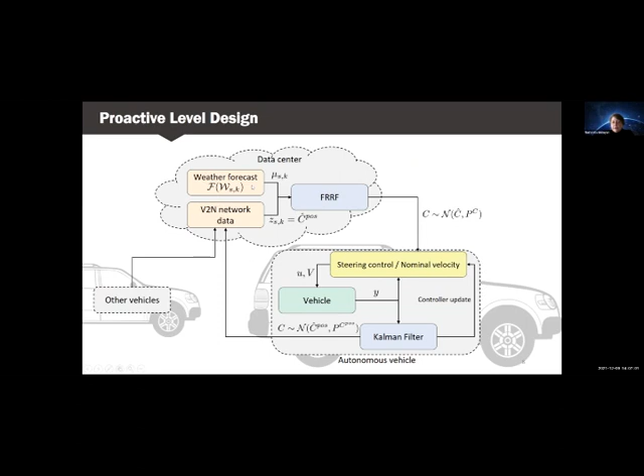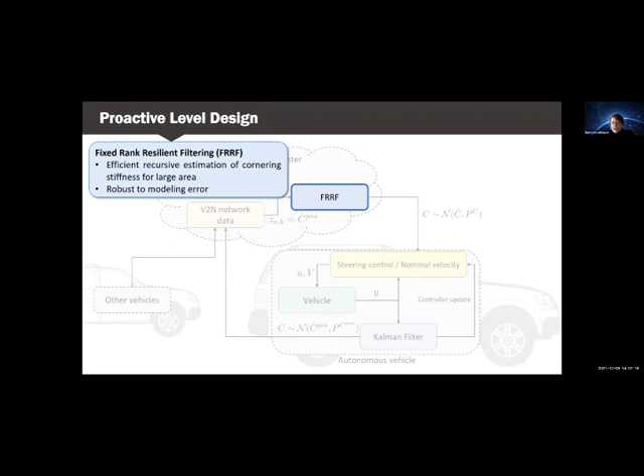This is the data center. It gets the weather forecast and it has access to the vehicular network data. So here we designed a fixed rank resilient filtering structure, which is an efficient recursive estimation of cornering stiffness for a large area. It has robustness to modeling errors. So the fixed rank filtering and the resilient estimator work together here, to which we refer like FRRF.

So we combine these two types of filtering structures into one combined estimator, to which we refer like FRRF. So this is an efficient recursive estimation scheme for cornering stiffness for large areas. It's a spatiotemporal filter, which is important for this proactive adaptation. It has a special way of choosing hidden states that makes it different from the typical Kalman filter.

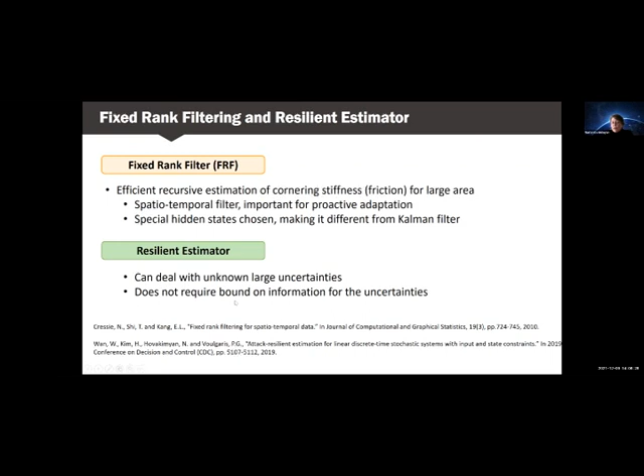And for that, we'll have to refer to our paper, which was published in a conference this year. Unfortunately, I do not have it here, but it's the same type of mechanism that's used in this paper 2010, from where we have borrowed this fixed rank filter. The resilient estimator is also from one of our papers, so it can deal with unknown large uncertainties, and it does not require a bound on information for the uncertainties. So we bring these two together.

So the variables of interest can be computed according to an equation, which is like a linear-like structure. So mu would be the weather information data coming through this cloud, and these are the hidden states in the dynamics, as I said. And the resilient estimator will give us an alternative way for computing these hidden states. So basically in this fixed rank filter, we'll replace these hidden states with our resilient estimator. That's why this combined structure we refer to as fixed rank resilient filtering.

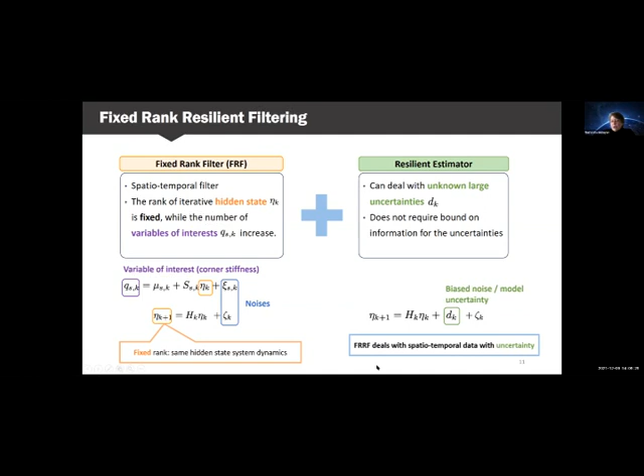This helped us to significantly improve our estimation accuracy of this cornering stiffness, which helped to make this proactive adaptation level very effective. So it deals with spatiotemporal data with uncertainty in a very robust way.

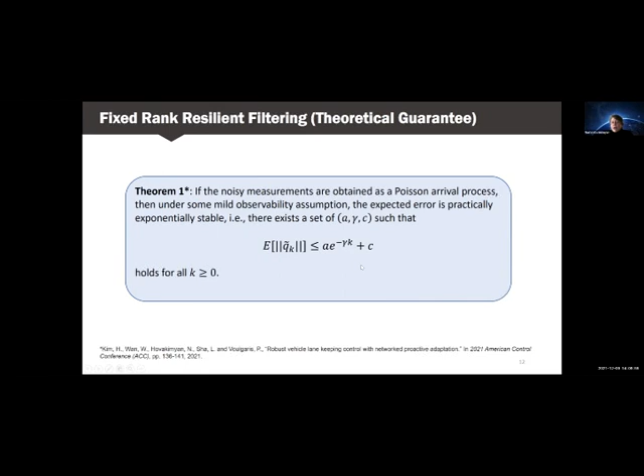And here is the main theorem, and here is our paper that I said, where we have the complete formulation of it. And the theorem would state that if the noisy measurements are obtained as a Poisson arrival process, then under some mild observability assumption, the expected error is practically exponentially stable, which means that there exists a set of coefficients such that the expectation can be upper bounded with this exponentially decaying term.

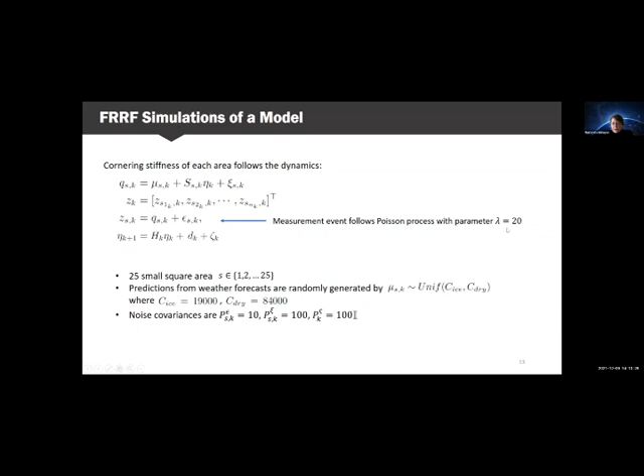So here is some simulation done to show how it works. It's a model that has, for example, 25 small square areas. I'll show it on the next slide, how they look. Predictions from weather forecasts are randomly generated. So here are icy conditions, dry conditions, as you see. Noise covariances are set according to these parameters, and the measurement event follows a Poisson process with parameter 20. And our model system uncertainty is given through a sinusoid.

Here is the area. So yellow is dry and red is the wet. So this is the prior estimation heat map. And we see that the FRRF performance is pretty good here. So this behavior is very good, which means that the filter works very well.

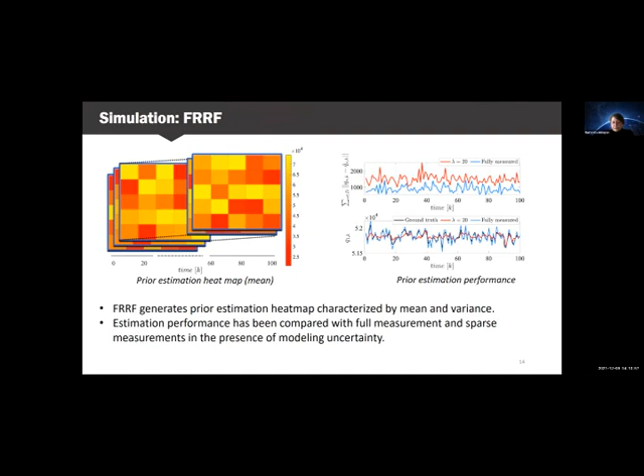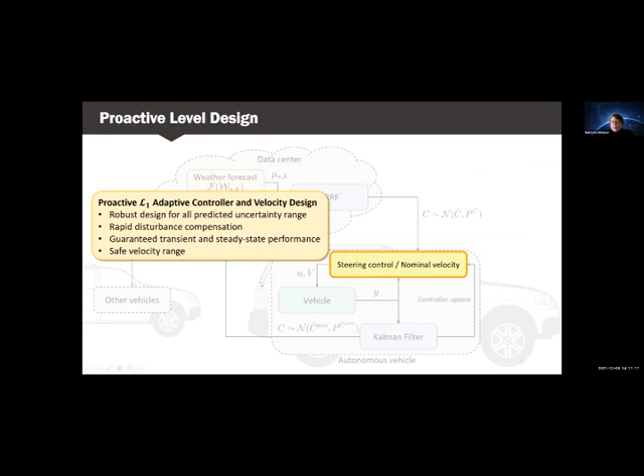And then, for the proactive level, we also design, like I said, the robust adaptive controller, which is designed for the predicted uncertainty range with rapid disturbance compensation. Here we use our typical L1 adaptive controller that has already proven its worth in real world demonstrations like our Learjet flights, NASA AirSTAR flights, F-16 flights. So I will give a brief overview of it.

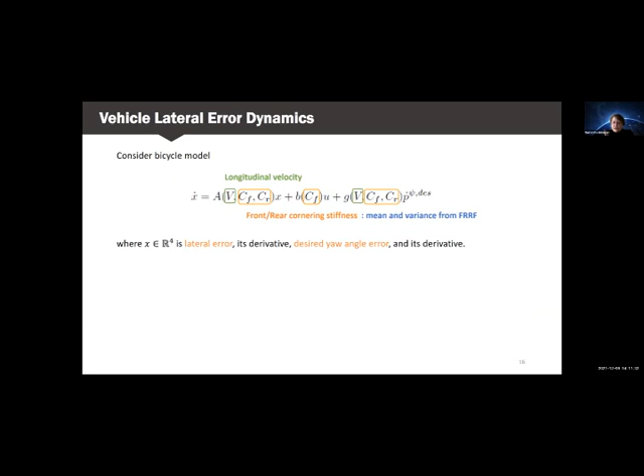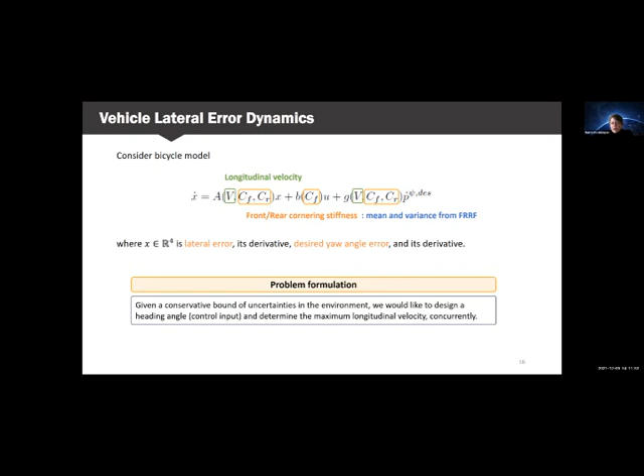So for this simulation purposes, we use a bicycle model here. Front and rear cornering stiffnesses, mean and variance from FRRF, as you see here, the colors indicate. And the problem formulation is, given a conservative bound of uncertainty in the environment, we would like to design a heading angle and determine the maximum longitudinal velocity concurrently. The L1 adaptive control solution is given here.

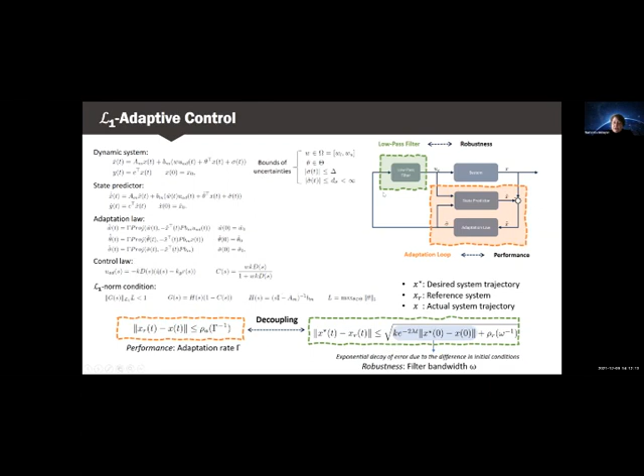I won't go through the detail, but I'll just explain the essence. So what it does, given a system, we design its state predictor using the difference as an error signal. We have estimation laws, and then using these estimated parameters, we design a low pass filtering structure to build the control law that goes both into the system and the predictor.

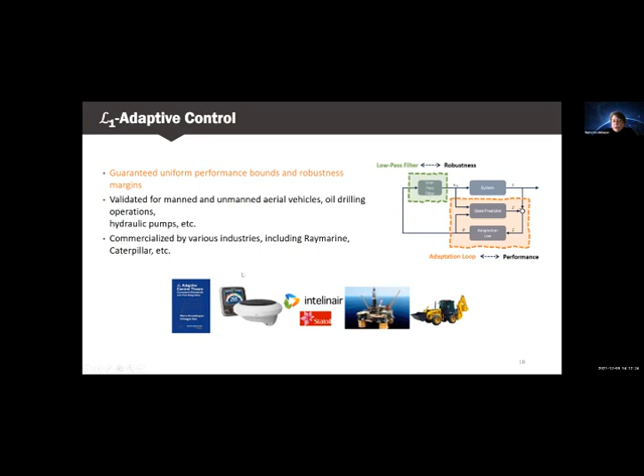This L1 adaptive controller has been implemented and commercialized across a few industries. We have a book, in case you are interested. Here is a time history of it. We have been flying on NASA's Airstar, which is a subscale commercial Boeing 757 model. Then we had lots of commercializations for Raymarine Evolution Autopilot. We had

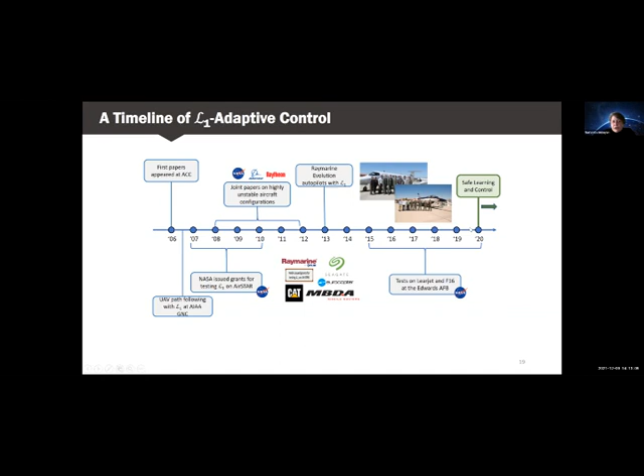hydraulic pumps of Caterpillar. We had MBDA, Eurocopter, Seagate projects going on. We had Raymarine, Boeing collaborations, and we had Learjet F-16 flight tests. Later now we are doing safe learning with L1 adaptive control. In case you are interested, I can show you the Learjet flight tests just to see how the pilots are using it. So you should have the voice.

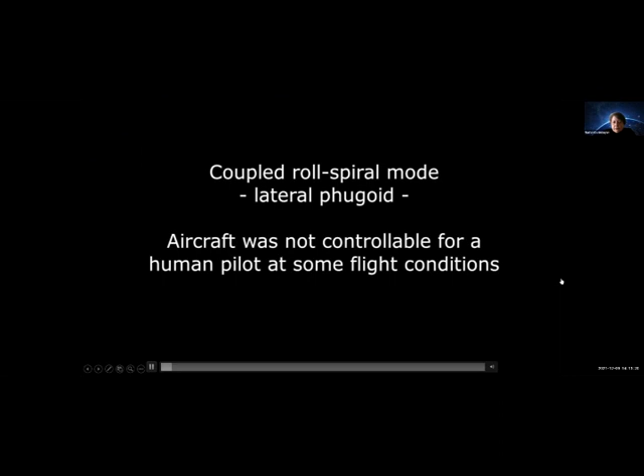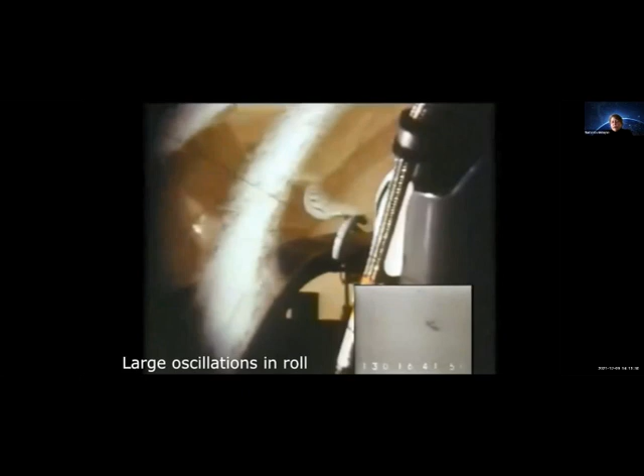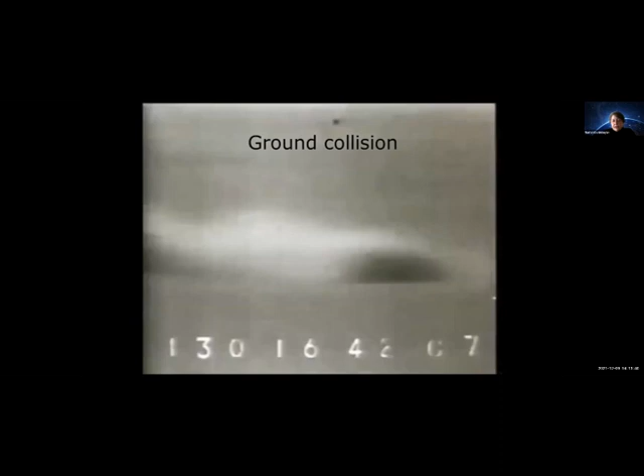This is an accident that happened in 1967. Luckily, the pilot survived. And when we go to Edwards Air Force Base, they have the accident data that they can load on the airplane and turn on our L1 adaptive controller to see how it behaves. And we can see how our controller can handle this type of accident. So here it is. Now they load the accident data and the safety switches come on.

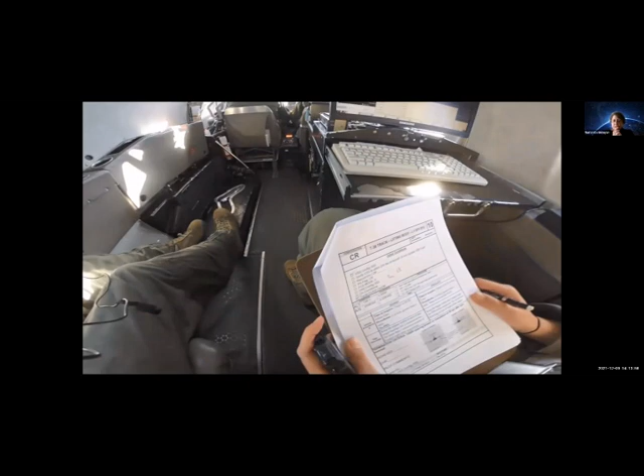This is a test aircraft. They can test any condition they want. The safety switches will save. I can't even control the airplane. You have the airplane? And now they will test the same condition with our L1 adaptive controller.

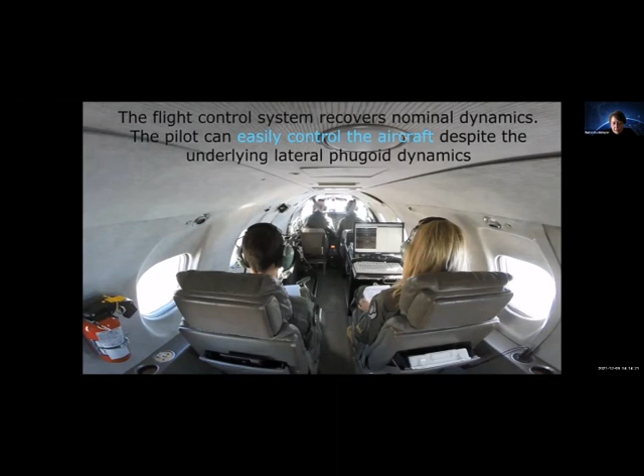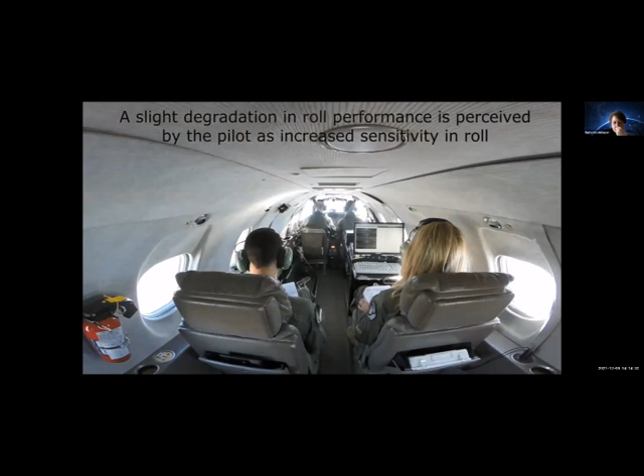Task in 3, 2, 1, now. So you can feel there in high frequency, I made some high frequency inputs, excited the roll. Lower frequency, the roll overshoot or oscillation tendency is less. Sounds good. There's still some there. Pitch, I'm having no issues. Fine tracking and gross tracking are very good in pitch. All right, and I have maneuver complete.

Now they have engine out tasks, which are very interesting, how they shut down the engine and they're still able to fly it.

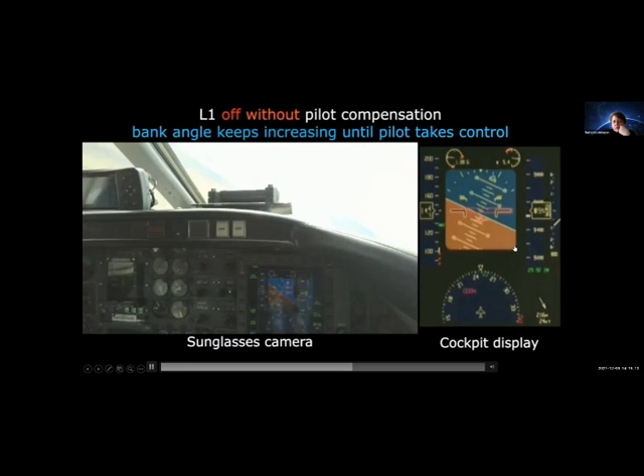All right, recording on in ready, hack. Running. Okay, power's coming back. My hands are free. 3, 2, 1, now. Controls fixed. And recover, please. Okay, and recovering. Power's back. I'm ready to try this now with a pilot correcting for it. Okay, I'll give it about 1 second of reaction time. I am on conditions. All right, and then recording on my call. Ready, ready, hack. On. Okay, power, it'll be left throttle. In 3, 2, 1, now. 1 potato and recovery. And recording off. Okay, recording off, matching throttles.

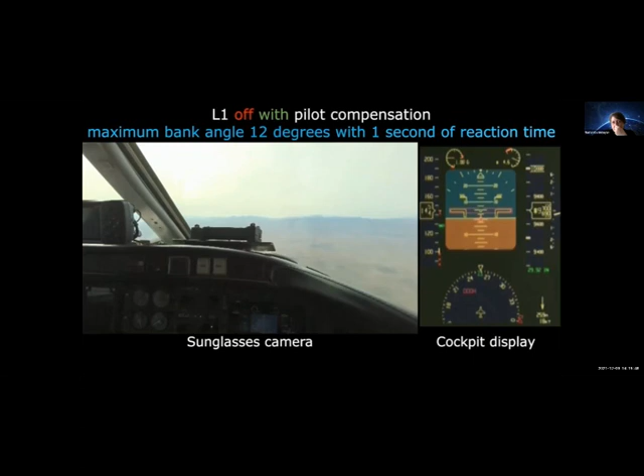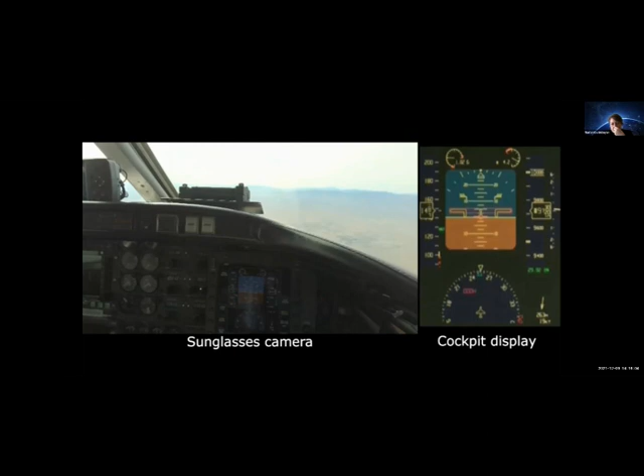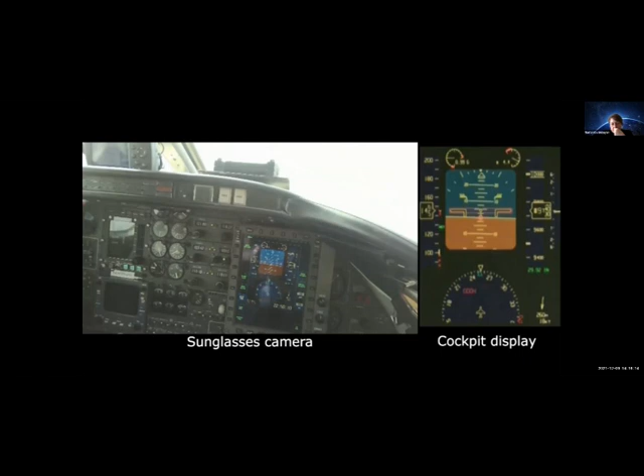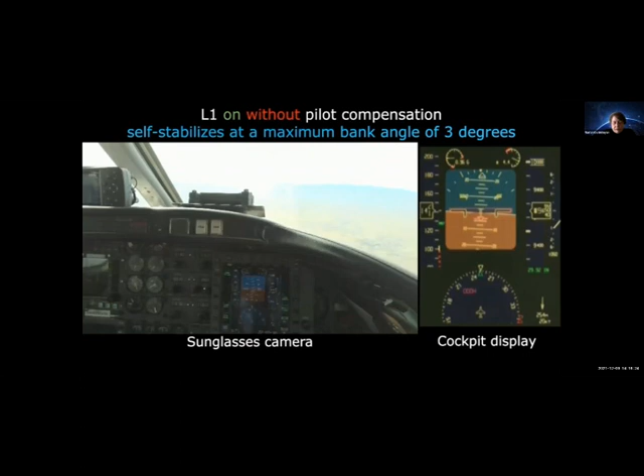I'm ready for the recording on, ready, ready, hack. On. Okay, left throttle coming back in 3, 2, 1, now. I'm not touching the controls. Nice demonstration. Yeah, check that out. About 3 degrees of left bank. Feeding in the rudder to match, I can feel that. It is descending a little bit, but that would be easy to compensate for. Okay, I think you got some good data there. All right, recording off. Matching power, recording's coming off.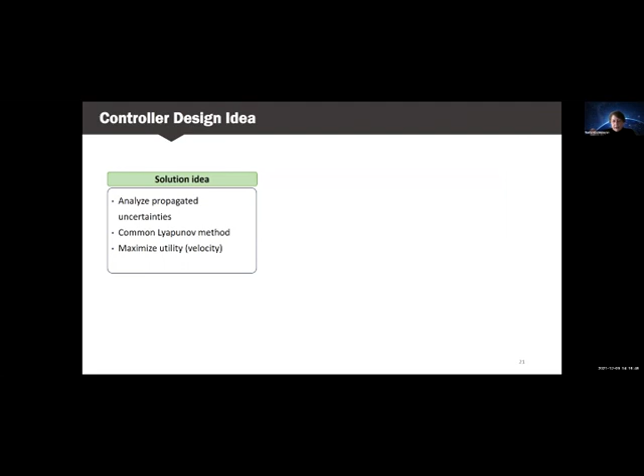So I always tell my students that in the real world, there is no 0. 3-degree degradation was already a pretty good result for us to be happy. Now what we're trying to do, we're trying to implement this L1 controller in this car scenario when they are connected over the cloud network.

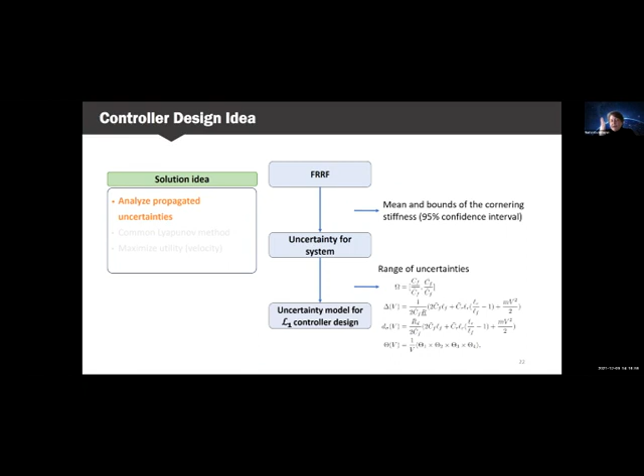So our complete solution idea includes analyzing the propagated uncertainties. So we have FRRF, that's the resilient filtering, as I said. So it will produce the mean and bounds of the cornering stiffness. So that's an estimation algorithm that is going to give us an estimate of the cornering stiffness with 95% confidence interval. So we will have an idea of the range of uncertainties.

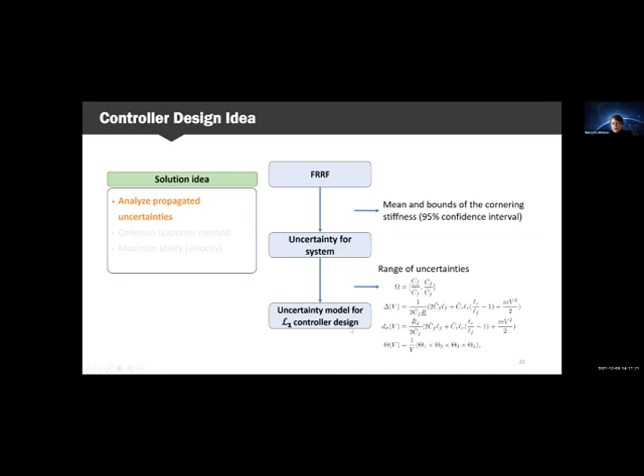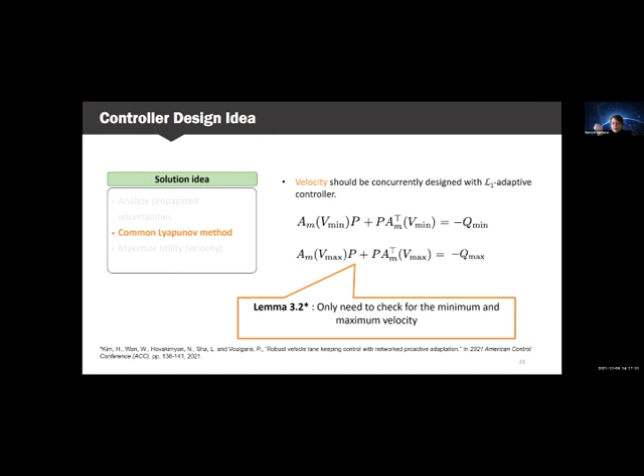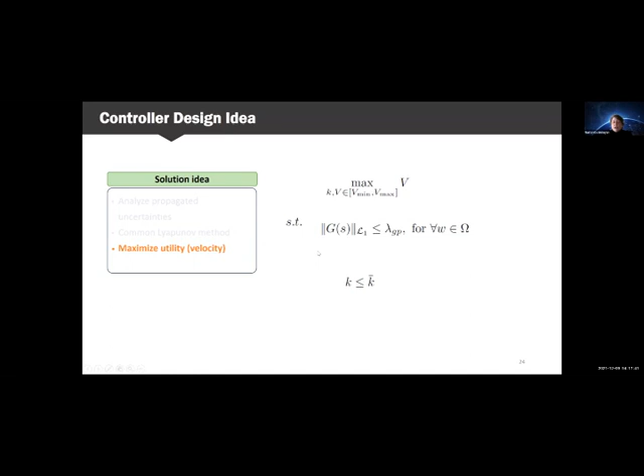When we have the idea of the range of uncertainties, we can implement the uncertainty model for the L1 controller design. So the L1 controller needs an uncertainty model to work so well. So we need a common Lyapunov method. So velocity should be concurrently designed with L1 adaptive controllers. So we only need to check for the minimum and maximum velocity. And we need to maximize utility velocity. So this is the L1 condition that we'll need to verify, okay? Maximize utility, performance guarantee, and robustness guarantee.

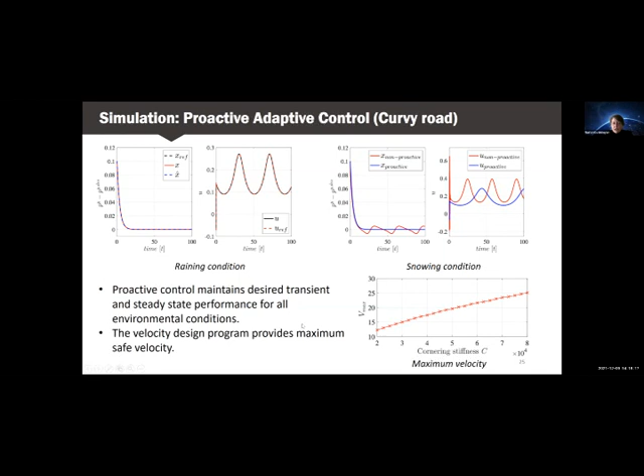And it's a curvy road, as you can see. So now the next. So what do we want to do? We want to move to the reactive level. So what's happening on the reactive level?

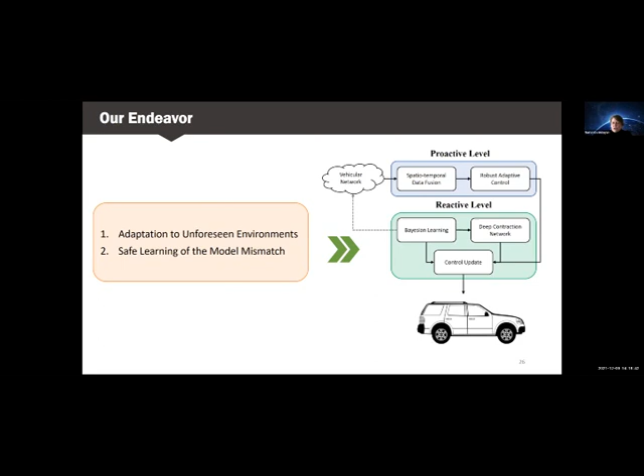On the reactive level, we want to be able to learn and minimize the model mismatch, because until now we had no learning. We had estimation and robust compensation, which had a somewhat conservative approach in it. But as we learn, we should be able to minimize the model mismatch and have less conservative behavior, so a more smooth approach.

This work, whatever I'm describing for this reactive layer, is supported under our AFOSR and NASA grant. It's not supported by your effort, but it nicely fits into this framework, so we can integrate our AFOSR and NASA work-based solutions into this car framework and show, for example, how it works.

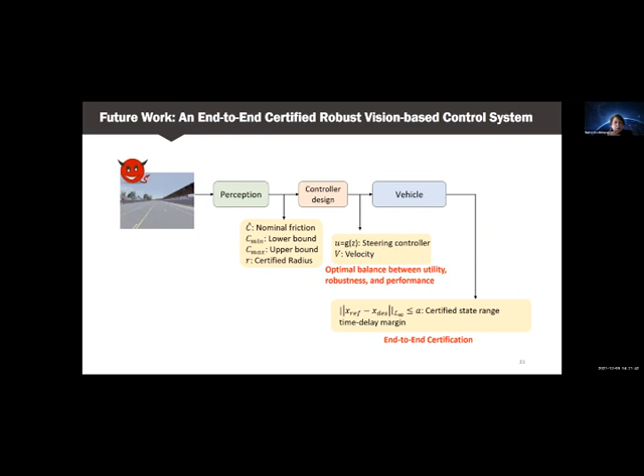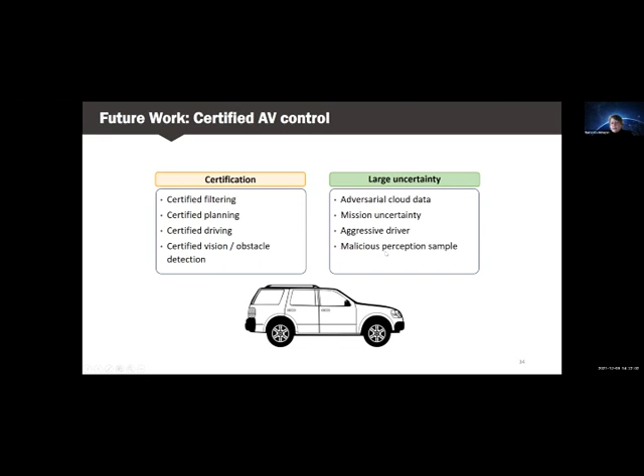So UIUC is one of the partner institutes. The planning grant is coming to an end, and we are in the process of putting the full proposal together. So the future work would be the certified AV control: certification for filtering, planning, driving, vision obstacle detection, for large uncertainties like those that exist with adversarial cloud data, mission uncertainty, aggressive drivers, malicious perception samples.

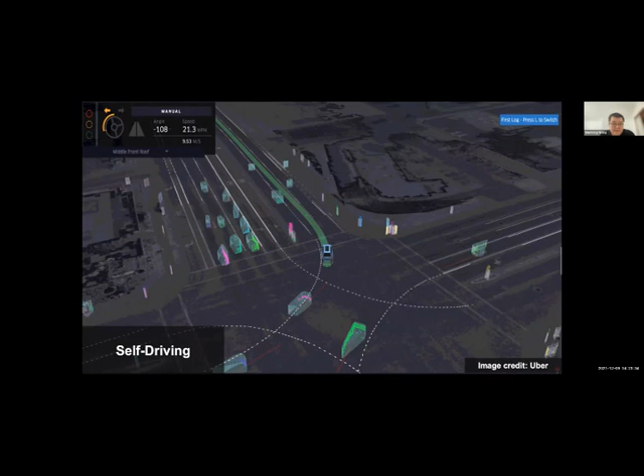That being said, to reach this goal, it still requires years of effort to deliver the fully autonomous system that everyone can trust. In my opinion, there are several remaining desired goals for us to achieve towards full self-driving autonomy. Firstly, our self-driving vehicles need to be flexible enough to interact with human traffic participants and handle the uncertainties associated with human behaviors and intentions.

And secondly, self-driving cars need to be robust enough to handle rare and unseen events. Even if they cannot handle that, at least they need to stay safe and ask humans for help. And thirdly, we need our vehicles to scale up to the full world across geographic boundaries. And in the meantime, we need to maintain a reasonable price for scaling up our technology. And lastly, we need to have verified safety for our technical components in the form of both theoretical certificates and empirical findings.

While it is crucial to design new autonomy algorithms towards solving these challenges, in today's talk, I want to focus on another important topic, that is how could we build tools and data to evaluate self-driving cars' performance and verify its safety. So I believe our evaluation environment should also have the following 4 capacities corresponding to the 4 desired properties of autonomy. Firstly, since we expect the autonomy to interact with other traffic participants, this requires our evaluation environment to be also reactive, to include actors that can interact with the self-driving cars, just like what we humans do.

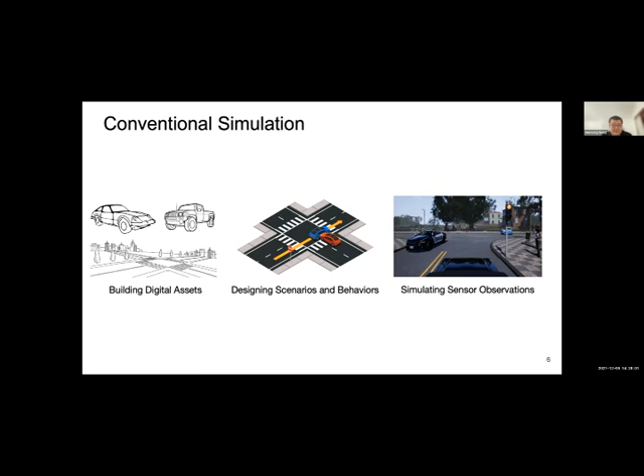So one of my group's research directions focuses on closing the reality gap between the simulation and the real world. So our philosophy is to design scalable and realistic simulation by leveraging real world data and machine learning techniques. Towards this, we have made progress on all 3 aspects: building 3D assets from the real world, creating scenarios, and simulating realistic sensor data. Due to the time constraint, this talk will briefly cover how we can simulate traffic scenarios and focus on how we can simulate realistic sensor observations. And finally, I will give an overview of our ongoing efforts in terms of how we can bridge the virtual world and the real world for better evaluation.

So in order to simulate, we firstly need to create realistic traffic scenarios, specifically given the self-driving vehicle's current state and the map of a surrounding area. So our goal is to generate the layout of the actors in the scene, which is a task that we call traffic scene generation. Here, the self-driving vehicle is shown in red and the other vehicles in blue, pedestrians in orange, and cyclists in green.

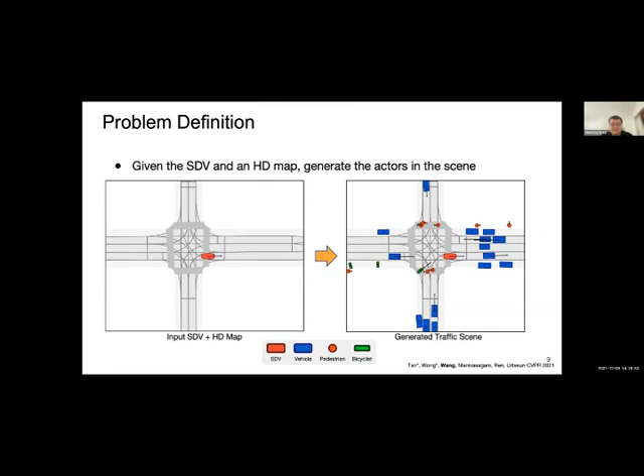So there are two major challenges here for traffic scenario generation. Firstly, the traffic scenes are highly structured. So we need the generated scenarios to be realistic and reflect the complicated interactive traffic rules and our common sense knowledge about driving. And secondly, given the input, there are infinite numbers of possible output traffic scenarios. So we need a generation process to deliver diverse results given the same input.

So towards this, our approach is simple and straightforward. At each step in the generation process, we take the current layout as an input and compute a distribution of the next actor. And then we sample the new actor from this distribution and put that actor into the scene with its proper attributes, such as location, type of the actor, orientation, velocity, etc. And then we can repeat this process iteratively, composing the scene by generating one actor at each time. At some point, we'll decide to stop and end the generation process.

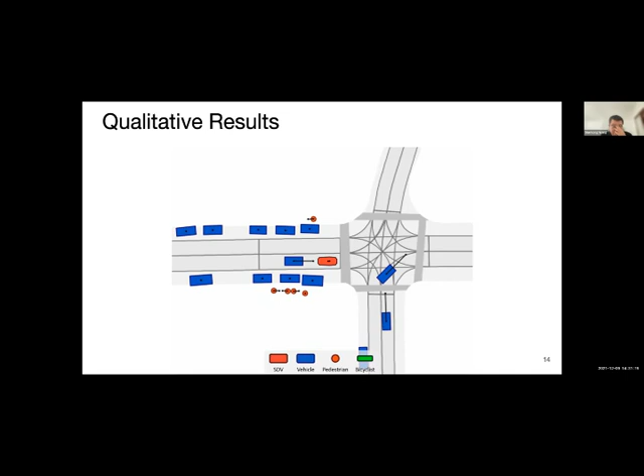So here we visualize our iterative generation process, which we've slowed down for demonstration purposes. Note that our method is able to generate traffic scenes that reflect the complexity and diversity of the real world, like, for instance, those parallel cars here on the left and the rightmost lanes, and a group of pedestrians that are on the sidewalk. Note that there are no rules or heuristics. It's purely learned from our data observations. And here we show our method could produce a scene in which two cyclists perform unprotected left turns.

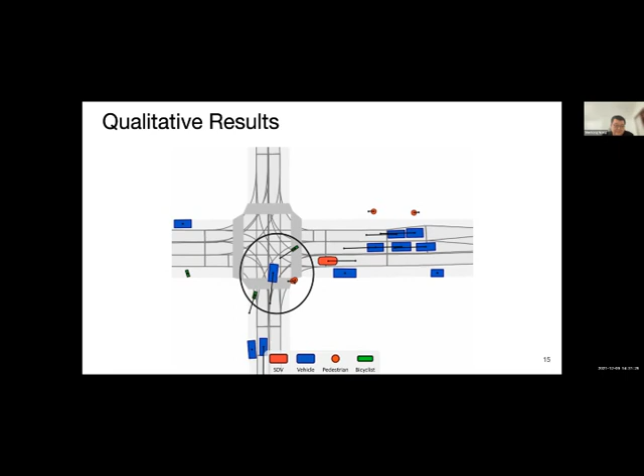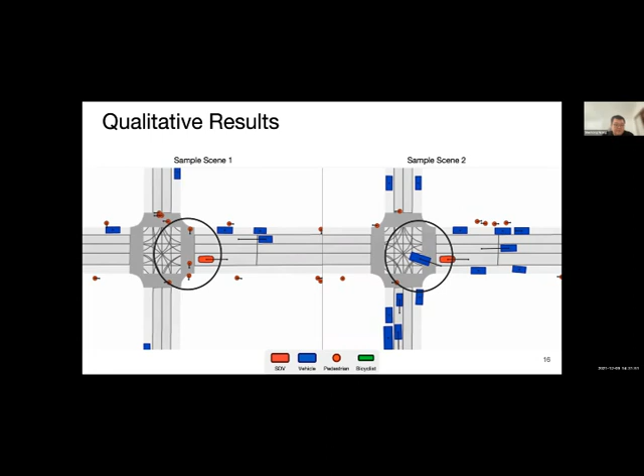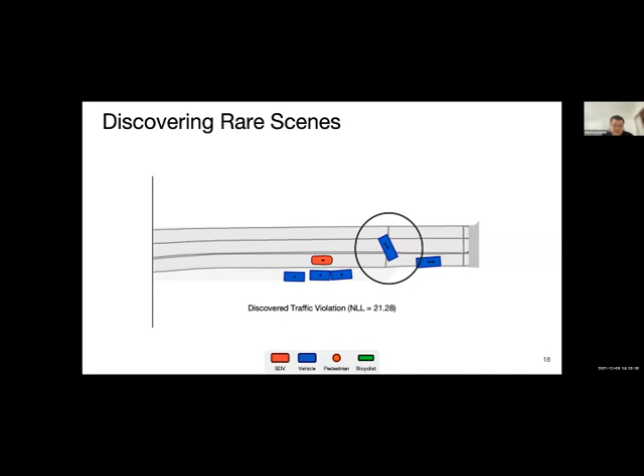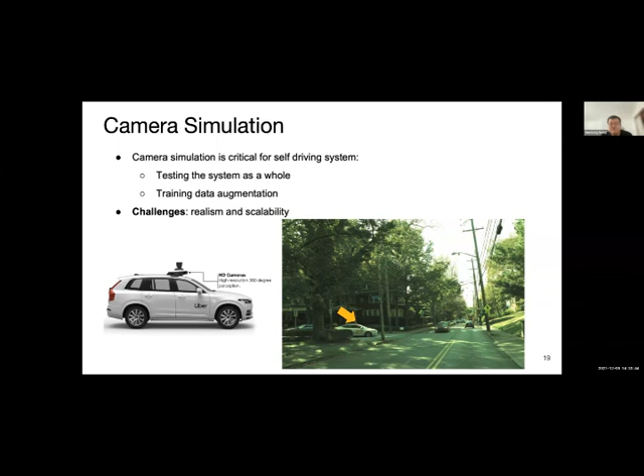So after we create novel realistic scenarios, we also want to render them out and produce realistic sensory input to autonomy for testing. So this is a task of sensor simulation. For instance, how could we test if the perception system would detect a vehicle if we add it here? Well, testing such situations in the real world might be too costly, risky, or even impossible. So camera simulation can help. It can also produce additional training data to better handle those situations. However, current methods are not realistic enough and cannot handle millions of scenarios.

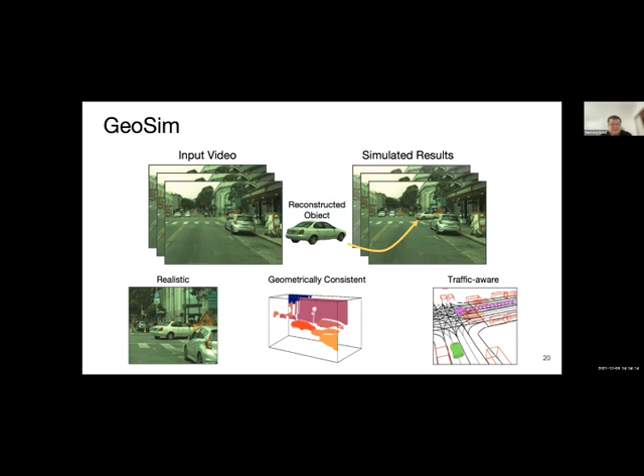So our work leverages a technique called insertion rendering from the domain of augmented reality to tackle that. To give a brief overview, we reconstruct 3D assets from the real world data and then insert the dynamic objects into the video sequence. The results are expected to be realistic, geometrically consistent, traffic aware, and scalable. Now let's take a deeper look at each step.

So we develop a neural network that can reconstruct accurate textured models in the wild from images collected during driving. We build a large and diverse asset bank with over 8,000 unique vehicles. Using the reconstructed 3D mesh, we can perform novel view rendering as I show here.

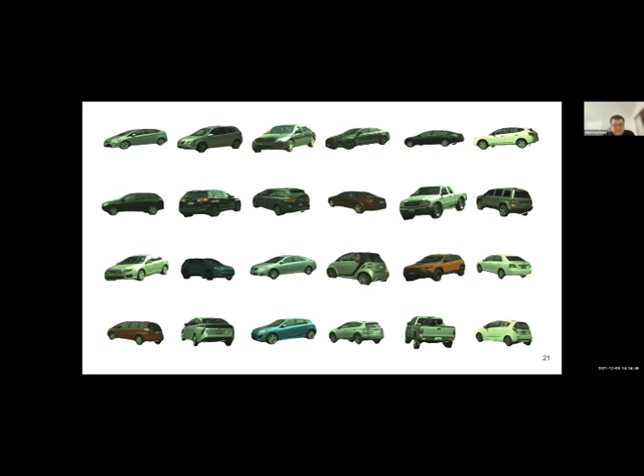And we now show how GeoSim leverages the asset library to insert actors and simulate new images. We firstly automatically generate a plausible placement using our scenario generation algorithm that I described before, and also produce a trajectory that complies with existing traffic. Then an asset is randomly selected for rendering. We then render the selected asset, like this car, at a new target pose. We account for occlusion by reasoning about the dense depth map predicted from our LiDAR and camera sensors.

So putting the object into the scene will also result in casted shadows and change of the shadings in the background. So we can account for them by rendering them inside a graphics engine to obtain the soft shadows and composite those shadow maps into the image as well.

And finally, we perform some post image composition to further retouch the final image. And we use a synthesis network to handle the inconsistent illumination and the discrepancies at the boundary so that the vehicle fits the environment seamlessly.

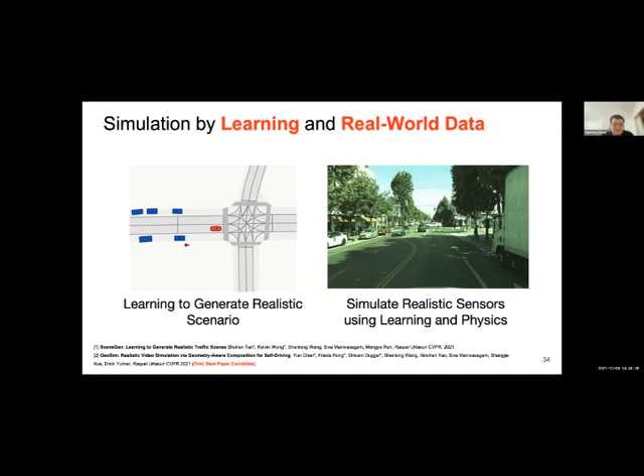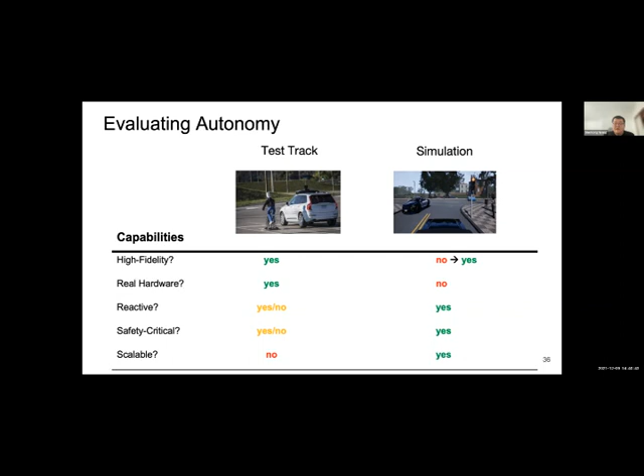And what is our next step? So far, we have seen how our research could boost the realism of self-driving simulation. In simulation, there's still a fundamental gap that can hardly be closed without taking the full real-world system into consideration. To be specific, in the simulation world, autonomy is interacting with the virtual environment. That means our physical world and mechanical systems are out of the testing loop, which is not ideal.

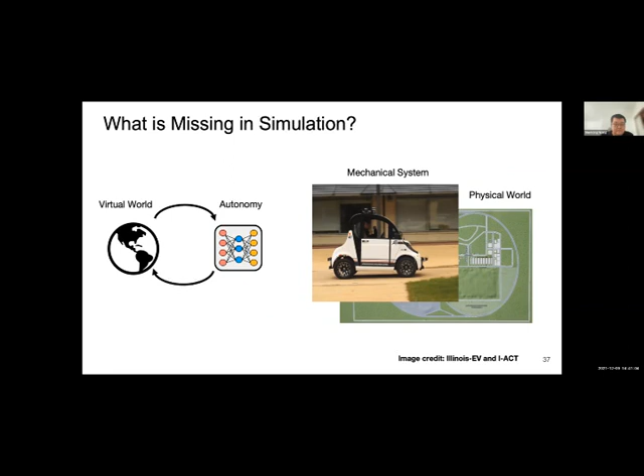To overcome this, in our STII-funded project, jointly with Professor David Forsyth from the computer science department, we are exploring a new validation paradigm that blends virtual safety-critical scenarios into the real world with onboard hardware. So specifically, you could consider that we have the self-driving cars wear a pair of AR glasses.

And specifically, suppose our car is driving on an empty test track and we plan to create testing scenarios with virtual actors having some risky behaviors. We can seamlessly insert those virtual events into real images perceived online from the physical world. And then we expect the resulting composed image to be photorealistic and physically grounded.

The manipulated images are fed into onboard autonomy, allowing us to test the self-driving vehicles to see whether they react to such virtual events correctly, but within a real world test track, like I-ACT in future, and real hardware system, like our Illinois EV platform. So this project's final goal is to develop a new safe, hardware-in-the-loop and cost-effective test for self-driving cars to respond to immersive, safety critical traffic scenarios.

As we could imagine, we could reliably test any safety critical scenarios with our real cars, but nothing will be potentially harmed, even if the testing fails. So the project is still ongoing, and we look forward to share more results and video footage of the real world test prototypes, hopefully early next year.